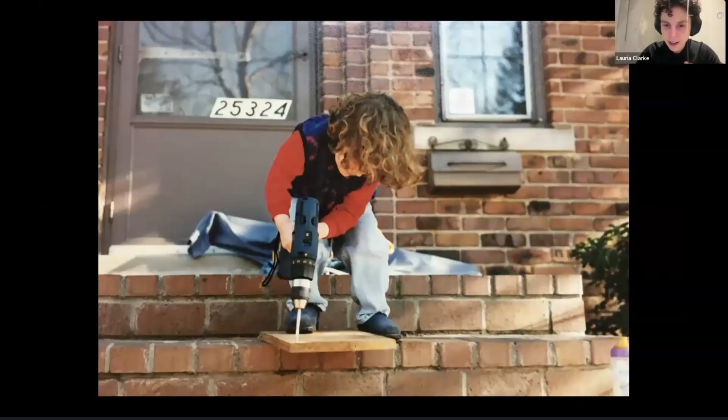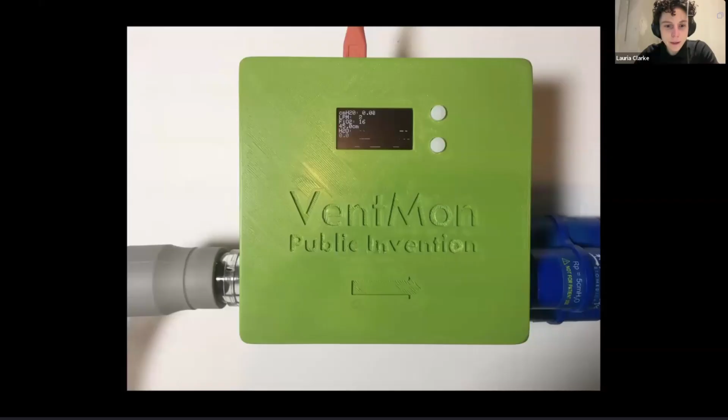I think Robert also had another copy in Texas at the time, and we went back and forth as we built the device. As the project matured, the look and feel of it did too. I think this was sort of a middle iteration, and perhaps at the very end of my involvement with the project. I think Forrest Lee Erickson was responsible for this awesome green enclosure and the nice LCD screen you see there.

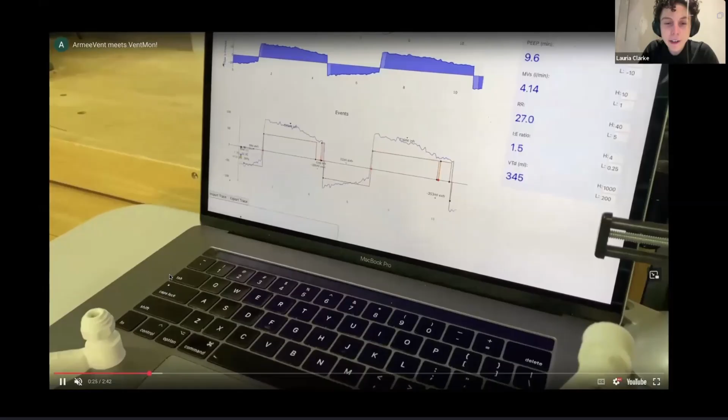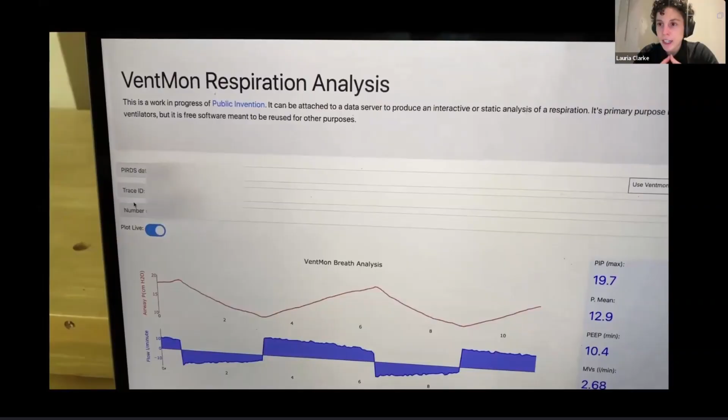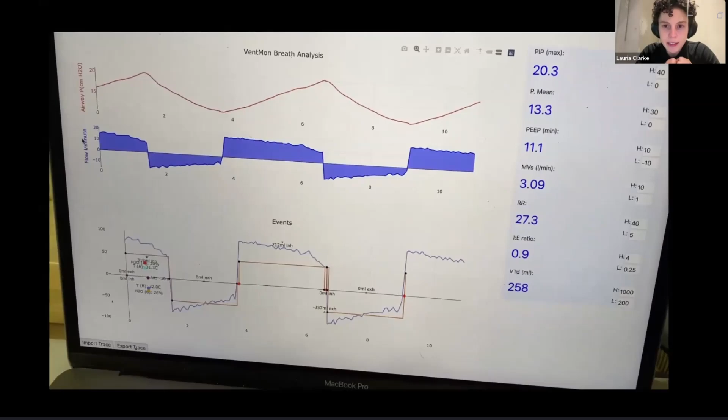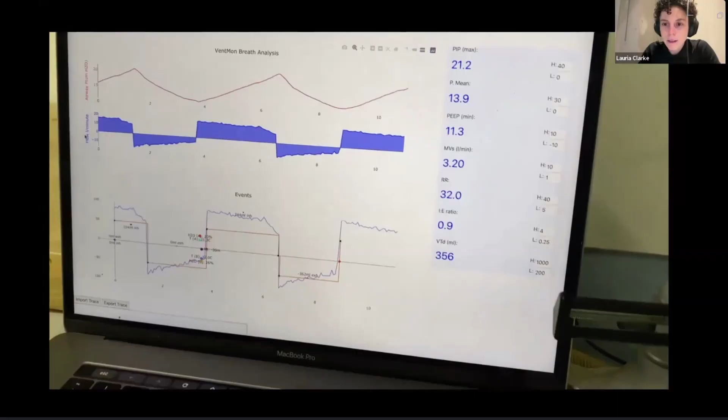I think the most exciting part of this project for me as a younger engineer was bridging this gap between physical hardware and digital data. This was the first time I'd worked on a project where we actually streamed real-time data that wasn't just a video stream or something like that, but actually manipulable, quantifiable data that needed quite a lot of different metrics and display values. So this was cool, my first example of this type of project, bridging a hardware interface to a browser-based web interface that anyone can access. As it turns out, this particular skill set has become totally crucial to what I do today.

So in general, I'm a creative technologist. I basically do the engineering, the electrical engineering, and embedded systems development behind artworks.

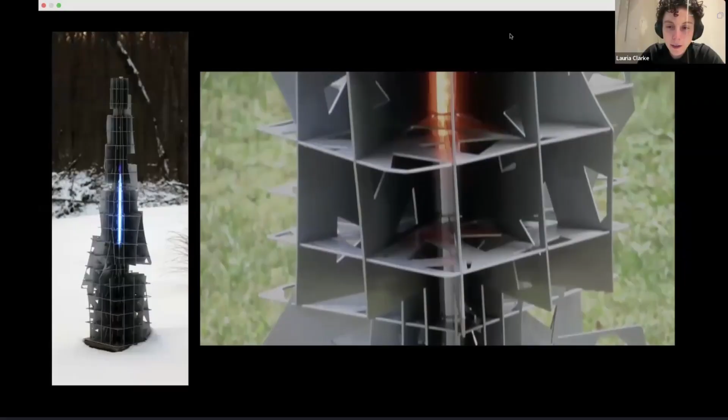I recently had a chance to rebuild an artwork that I created with my undergraduate mentor about 10 or 12 years ago. It was super satisfying to see the difference between my work in 2015 and now. I received this sculpture that sat outside for 10 years in my professor's yard, and eventually it stopped working. He contacted me about 6 months ago saying, hey, I have a solo show coming up, can we revive this sculpture? So I received this box of crusty, rusty electronics in the mail, and it was really fun to open it up and think, oh my gosh, what was 19 or 20-year-old me thinking. So it was fun to compare the 2015 version to the 2026 version.

For an indoor installation, we decided it would be way more fun if anyone could browse a map and pick a location anywhere in the world to find out what the wind speed was and the ambient air temperature, which affects the color of the animation. So for me, this project was super satisfying as a retrospective look at the past 12 years of my growth as an engineer, and a good reminder of how we bridge this hardware-to-interface gap. There are so many different ways.

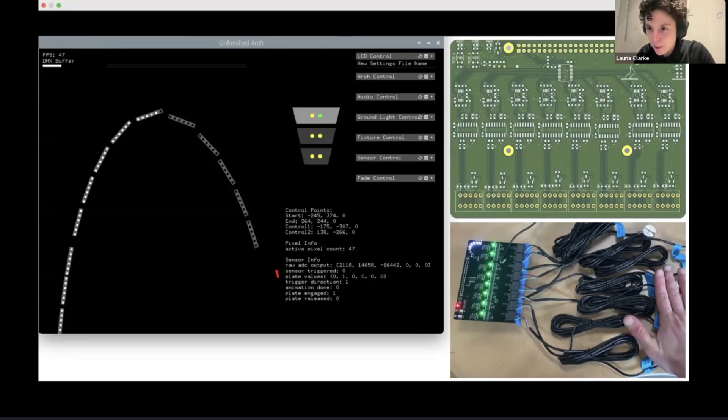In effect, these electronics are really similar to what you would find in a weigh station, which I found quite interesting. If you're ever curious about how weigh stations are protected from lightning strikes, it's a fun rabbit hole. Anyway, same way that giant metal sculptures with load cells in them are protected from lightning strikes.

So lots of hardware engineering in this job, and we're constantly revising the hardware that exists inside these artworks. In this case, I've spent a lot of time recently creating a custom ESP32 based development board that has a special audio amplifier, and this is going to be used in an artwork that contains thousands of speakers, which all make a different noise, and they're activated by viewers present in a room. We're constantly trying to iterate on the hardware and software behind these artworks to make them more responsive, more flexible, and more adaptive to different installation environments.

So in this case, our main objective is, how do we upload new sound files to each speaker over the air instead of having to manually pop an SD card in and out of each one, which, as you can imagine, when you get to 4,000, adds up.

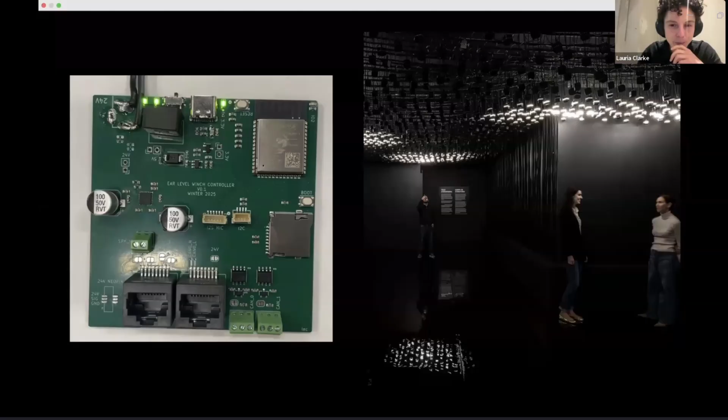I'll end with this recent artwork. We recently did a large show at the Museum of Modern Art in Mexico City. One of my jobs, or the artwork I was in charge of during this show, was called Homage to Felgérez. Manuel Felgérez is one of the first digital artists, pioneers of digital art in Mexico, and an inspiration to Rafael. So we knew that this kind of loose idea, that this particular artwork would be these three words projected in space onto this sculpture.

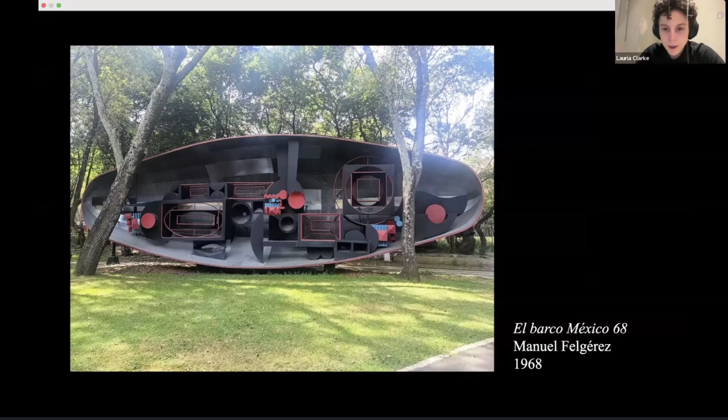Depending on the viewer's location along a path in front of the sculpture, different words would appear depending on your perspective. That was sort of the brief, and there wasn't too much more information. This was what a render looked like, and my colleague made this drawing, but nobody really knew what was going to happen once we arrived in Mexico, and there was about a week to figure it out.

So we bought some projectors with the different words. These are the kind of projectors you would see outside a store, for example, spinning on the sidewalk with an advertisement. I arrived in Mexico with 2 Pelican cases full of stuff. I've got one right next to me right now. Don't go anywhere without them.

Because we weren't sure if we were going to be using Axis security cameras to detect people near the sculpture, or if we were just going to put it on a timer, or project all 3 words at the same time, there were lots of unknowns, and we really needed to be in the space before understanding all of these variables. So in the end, we realized that the amount of time people walk by this artwork isn't actually that long.

It's only about a minute at most if you walk slowly, so we had a minute of time to capture people's attention. Therefore, tracking people all moving in the same direction wasn't going to be useful to us. So we determined that using a simple timer sequence would be the most effective way to move through the words and help people move along the path with the 3 words.

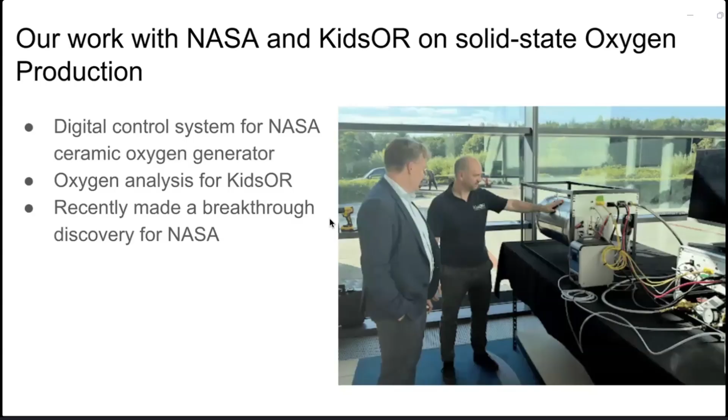We did not make the chemistry. We did not make the solid oxide actual oxygen generator, which is the most interesting high-tech part. But we made all the other electronic stuff around it that controls it and keeps it at the right temperature, which is no joke because it operates at 750 degrees C. Now, I'm happy to say that recently we've made a pretty major breakthrough that NASA is excited about on this project as well. So now I'd like to hand the mic over to Victoria.

Thank you, Rob. I realized that my red light and my nebula picture makes me look very red, but there's nothing I can do about that right now.

I'm here to talk about Global Distributed Tracking, which is a software platform built under the Global Open Source Quality Assurance System, which is a project of Public Invention. And we have a launch video that we'd like to share with you. Rob, go ahead with that.

Across the globe, delivering life-saving aid. But tracking those vital shipments to the last mile can often prove impossible. Fraud and theft can be widespread with no transparent documentation to light the way.

From the open source team that built a new PPE supply chain in 2020 and became NASA contractors in 2022 comes a solution. Our Global Distributed Tracking System, GDT, allows you to track aid deliveries from point of origin to the final recipient. No download, no login, no fee.

With a simple scan of a QR code, you can ensure that aid reaches the right person. Because GDT is fully encrypted, documentation is secure and private, even in conflict zones. Now, anyone with a smartphone can verify chain of custody within their humanitarian mission. Global Distributed Tracking.

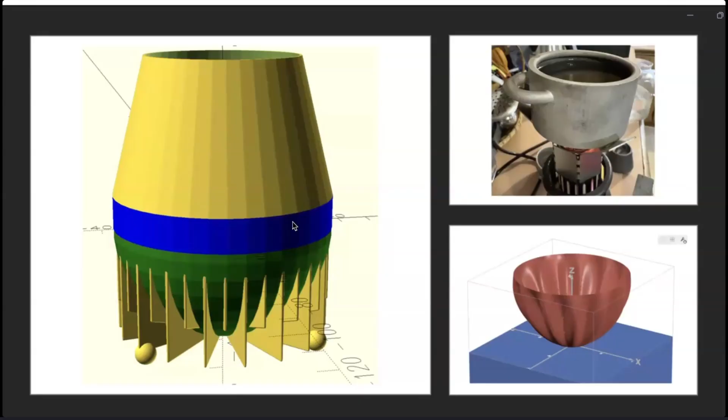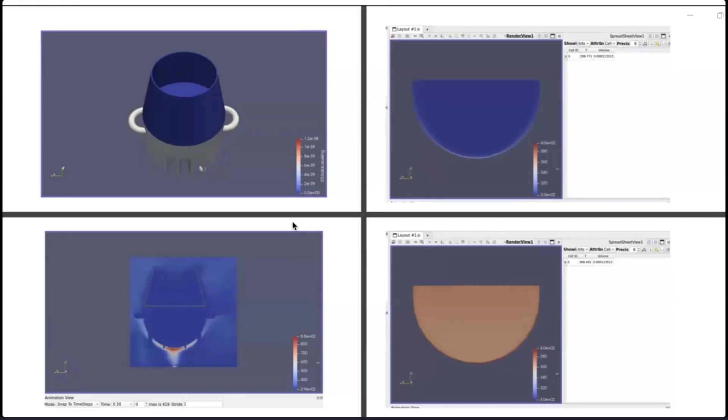The 2 pictures on the right show the water inside the pot during a simulation. The top right is the water at the beginning of the simulation, and the bottom right is the water probably about 2/3 of the way through, and you can see the difference in temperature. This will be used to calculate the efficiency of the pots. And that's just a quick overview of what the EcoPot project is.

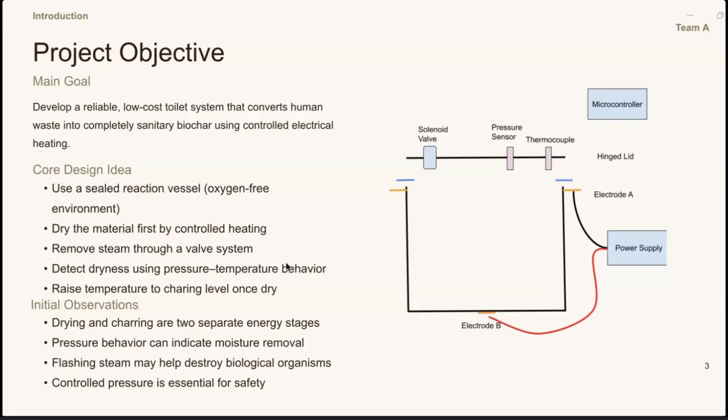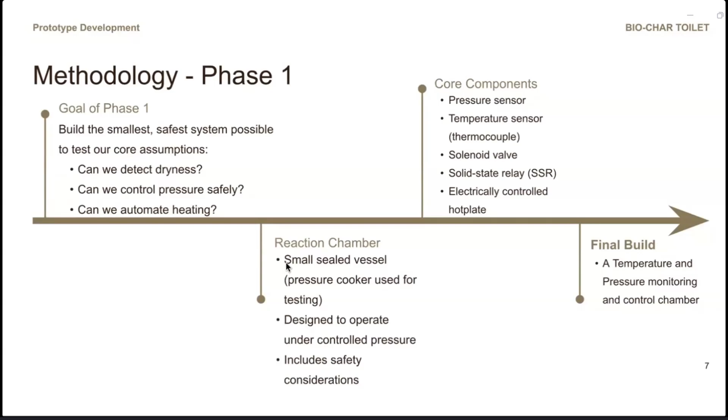So our first goal questions are: can we detect the dryness, and can we keep the pressure in the chamber safe? Because handling a high pressure environment is always a hazard. Can we automate the heating process, and can we turn off the heating when the pressure is detected?

What it actually does is dry the material in the sealed chamber, and when it detects there is no moisture content in the chamber, assuming the heating is still increasing and there is no change in the pressure, it detects the sample as dried.

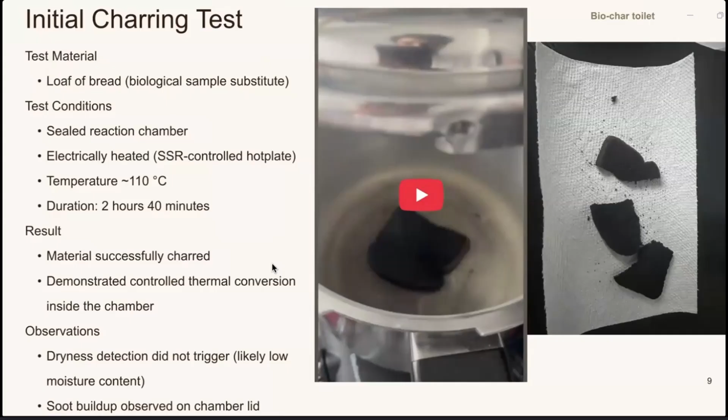One thing we observed is that because the samples were very small, we were not able to detect the dryness of the sample. Also, there's a lot of soot residue which has formed at the top of the lid. So these are the next two goals we are going to tackle.

So, yeah, and heading over to Peter.

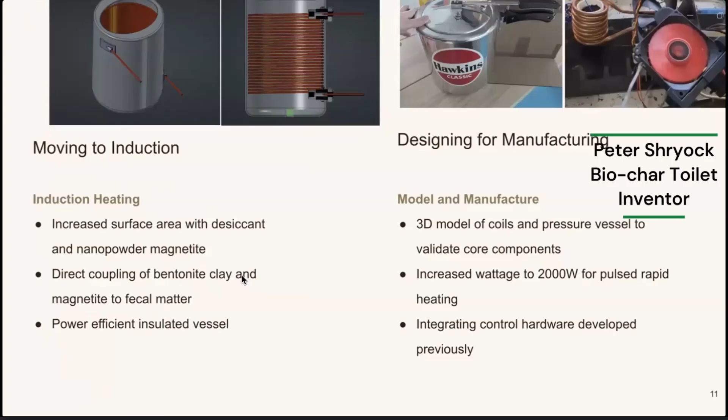Hey guys, so what we're going to work on next is developing an induction system with a bentonite clay and magnetite blend. Our hope is to use the bentonite clay to wick up the moisture, and the magnetite embedded in it will heat up using induction coils, so we have more thorough heating of the sample, better control, and ideally make it more efficient.

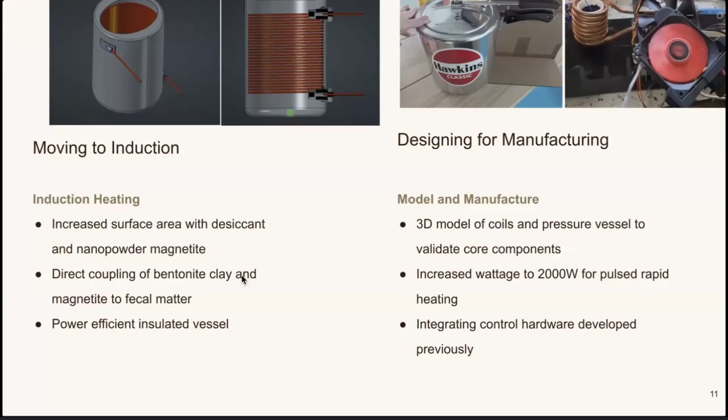We're currently modifying a Hawkins Classic pressure cooker, and we intend to bend our own coils and make some of our own modifications to the fittings as needed. We're hoping this will be really successful, of course.

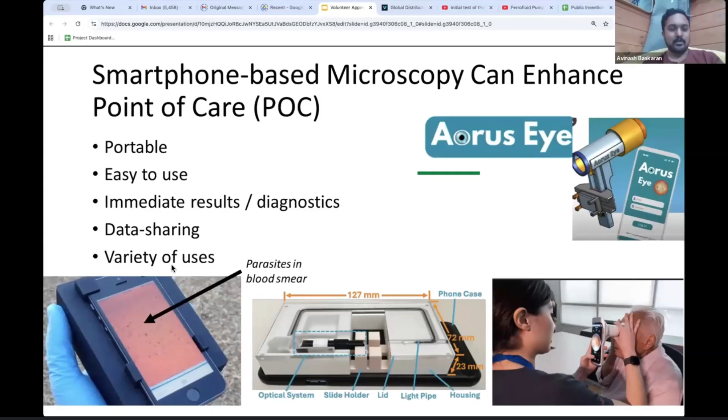So I'm representing the Librecorder project. Librecorder is an attempt to address some of the issues around smartphone-based microscopy, mobile microscopy, or generally point-of-care microscopy. Currently there's a diverse range of designs being explored for point-of-care microscopy, that is microscopy done at the interface where a patient first interacts with a healthcare professional.

The benefits of such a system are obvious: it could be portable, easy to use, provide immediate results in diagnostics. The data could be shared and portable, and really a variety of uses come from that. For example, it can be used in healthcare settings, but perhaps also to identify E. coli presence in local water supplies and so forth.

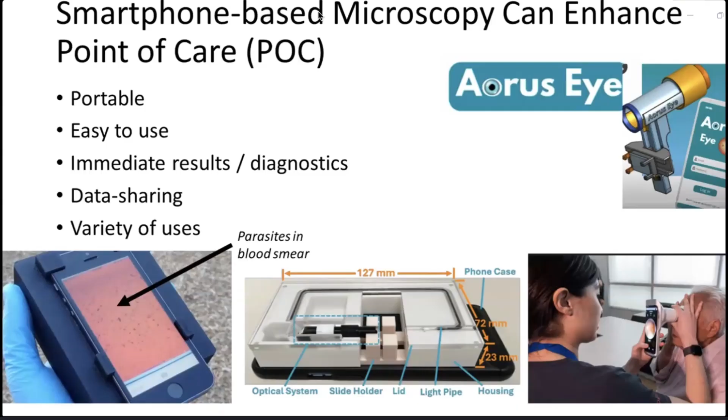What we realized when we started to analyze the design space of point-of-care microscopy is that each design and device is highly localized to a particular disease context and geographical context, among other constraints.

We started asking ourselves, there are a lot of strengths and weaknesses to the diverse designs, but how do we quantify whether a design is appropriate or well suited to the disease and context it's trying to tackle? And from there, how do we design a microscope that is both generalizable and highly useful?

This is just an overview, but we've actually written a pretty comprehensive systematic literature review of microscope diagnosable diseases and the clinical workflows involved in diagnosing those diseases, down to a very detailed level.

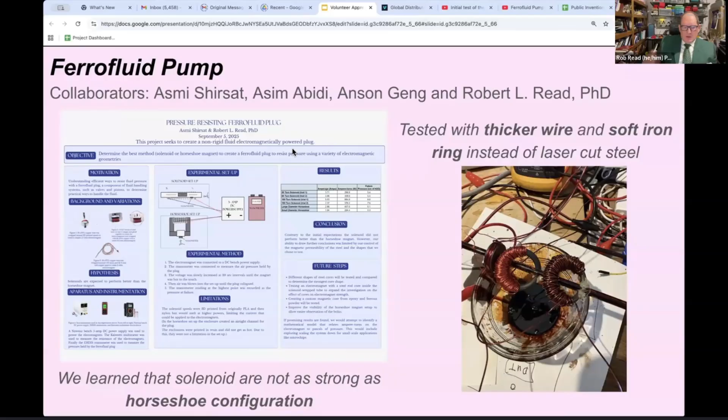Yes, so my name is Asmi, and I'll be presenting the Ferrofluid pump, which is an electromagnetically powered pump. The idea was to have something with no rigid parts made from ferrofluid, which, if you don't know, is a magnetic fluid. I'm working with Asim, who's actually in the call right now, and Anson, who can't make it, and with a lot of help from Robert.

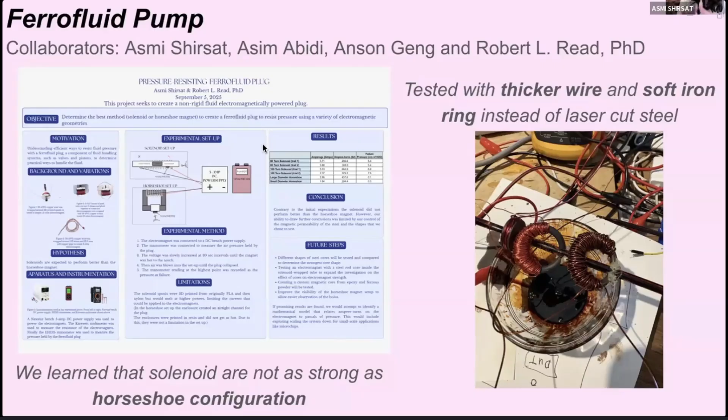Like we said, initially it was a little bit slower. So initially we just started with a ferrofluid plug, and we tried to understand how much pressure it could hold, and how we could change the amount of turns, the core material and the core shape, and how many things we could change to really get a strong pump or a strong plug. We learned that the horseshoe configuration was a bit stronger, using thicker wire and a soft iron ring as a core. Those initial conclusions were made to now lay the foundation of what we're working on right now. With that foundational knowledge, we're designing a pump that works by pulling ferrofluid up by turning on and off this magnet that you'll see.

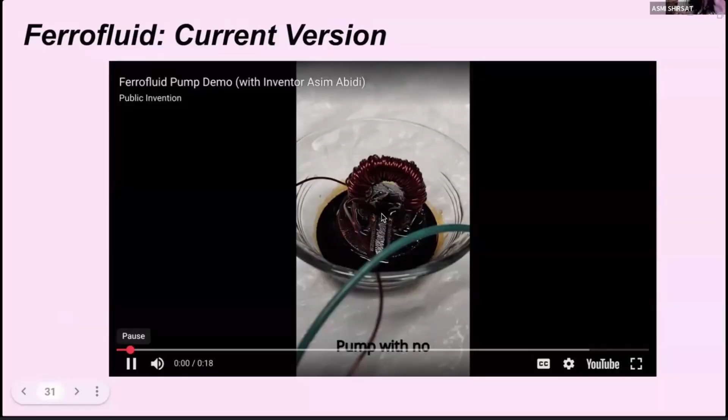And now after automating that pumping, we got a little bit of a more obvious and more efficient pump with no moving parts, tested with a 30 millisecond pull and 40 millisecond release.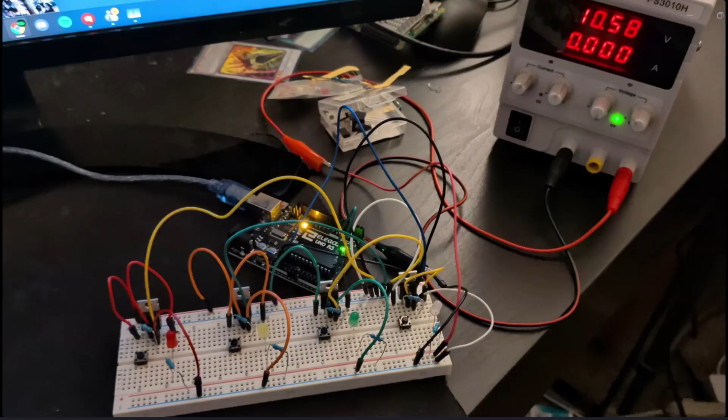That includes making a transistor setup, as you can see on the left, which is just a short video proving that it works. This is the current 4-transistor design without code, so the buttons are directly driving the 4 transistors. As you can see, they all work, and it takes amperage from the power source rather than the Arduino. The Arduino serves as a voltage supply to drive the transistor gates.

So we're basically working on how to make this singular magnet pump boat into something that can use more magnets to pump at a stronger rate and hold a stronger pressure. We're also going to consider using air pressure, so it's not something that has to be vertical. There's a lot of future things to do, and it's really exciting.

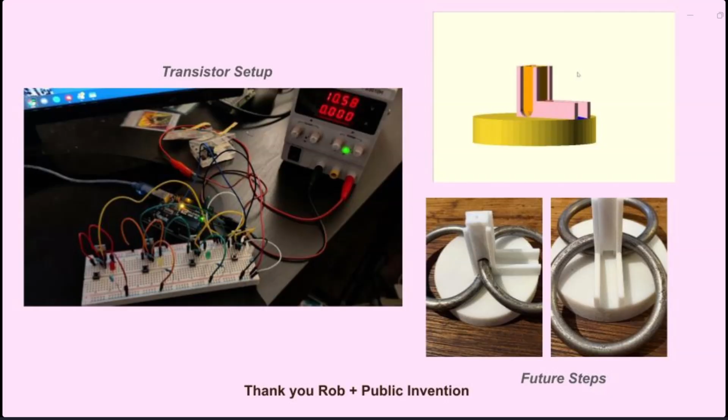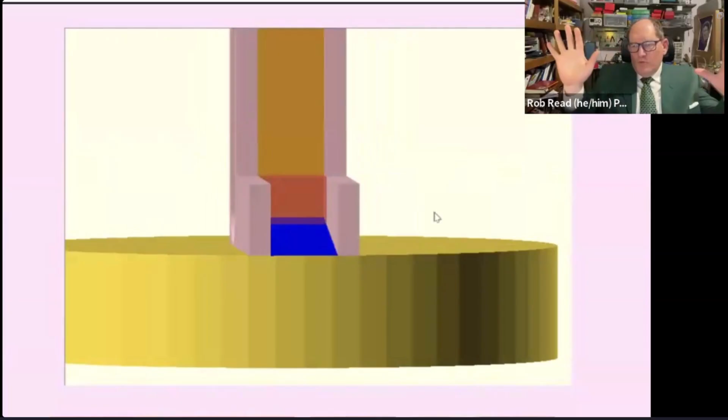I want to emphasize something because it can't be said enough. What you just saw was not a very good pump—it only pumped a little bit of fluid. But it has no moving parts. No moving parts, get that? We're pumping fluid with no moving parts. This is approximately the first time this has ever been done. This is, in my opinion, kind of a big deal. This is a game changer, because if you can make a pump with no moving parts, you can make an extremely small version of it—for example, to move fluid over a very hot microchip, or for biological purposes. So it looks like a janky little toy, but this is actually a very interesting invention, in my opinion.

Now I'd like to introduce Mohamad and Mzafar, who's also in Canada. I'm very proud of our international relations, and I hope our Canadian friends can forgive some of the horrible things that Americans have said about them recently.

Mohamad is going to introduce the alarm dialogue management system, which leads into the Krake. Are you here, Mohamad? Yes. Hi everyone, I'll be presenting the alarm dialogue management, or ADAM.

This project, alarm dialogue management, is basically an MQTT router. It's completely software, so there's no hardware part in it. Its goal is to manage multiple alarms and send them to multiple Krakes or annunciators or whatever thing.

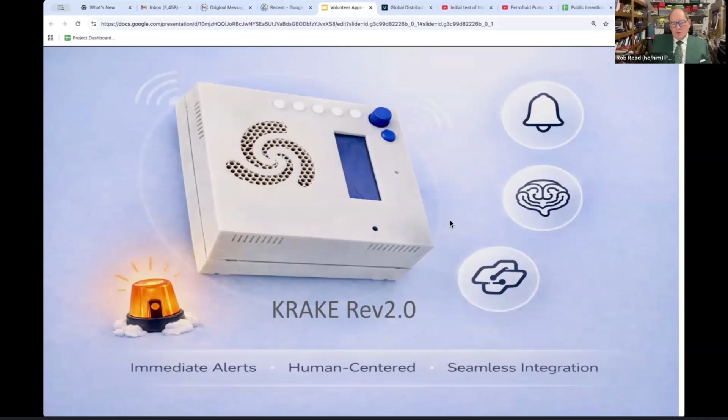There's also an excellent mechanical engineer, Yahya Ayman, from Egypt, and recently a woman from India, Yapti, has joined as well. And this team is mentored by Lee Erickson. I don't know if he's here, but Lee is a really excellent mentor for those kinds of things. So I think they have a video for us to play.

The Krake is a dedicated wireless alarm device designed to inform human operators of critical conditions they need to know about, clearly, reliably, and without distraction. Krake is an annunciator, a hardware device designed to get a human's attention and inform them about a specific problem. Krake have a protocol to handle alarms and process the response of the operator.

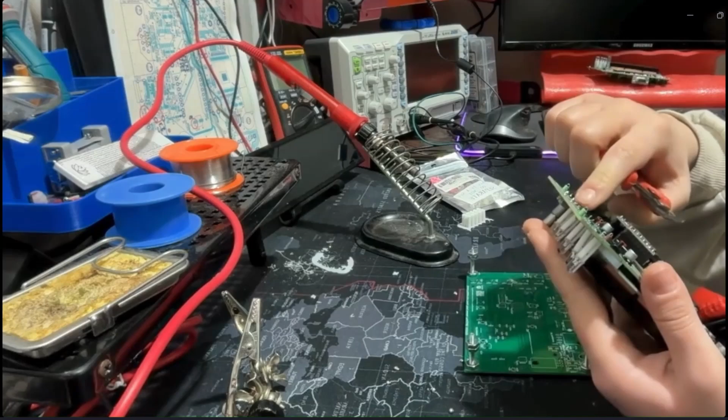There are a variety of uses for the Krake, such as in assisted living scenarios or in pairing with other equipment, medical or industrial, or to any other machines in your residence, providing immediate alerts for events based on policies and severities that are implemented by the ADAM and by a separate ADAM project.

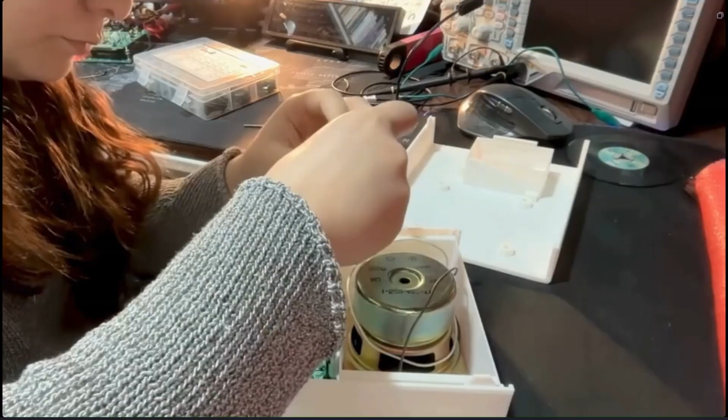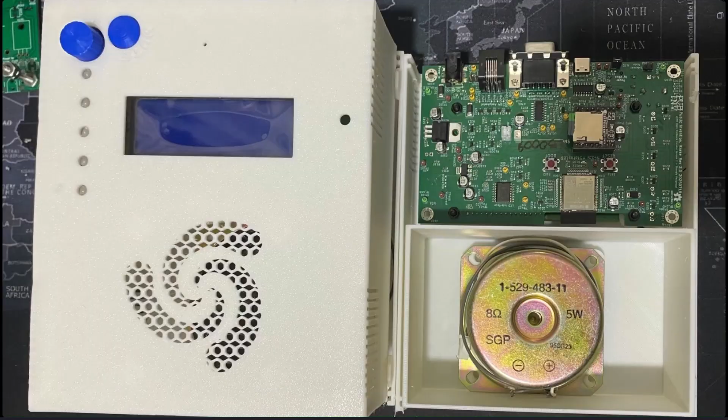To maximize interoperability, the Krake is designed with both SPI and UART connector, RJ12 and RS232, allowing Krake to be connected to equipment without Wi-Fi capabilities, acting as a peripheral device announcing the alarms of the machine it is connected to. The alarms are divided into 5 levels of severity, ranging from informational alarms to critical and emergent alarms. Krake helps deliver alarms that are timely, meaningful, and trusted when they matter most.

Krake features 5 bright LEDs for visual alerts, a customizable audio system for speech and alarms, an LCD display along with a rotary encoder for simple menu navigation, and a mute button to handle the alarms, Wi-Fi network connectivity, and 2 different power options to enhance its versatility.

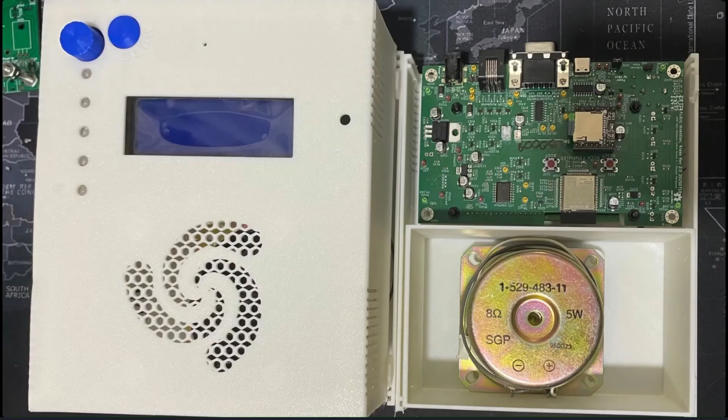Okay, so that was the voice of Courtney Ludick, and the part of the reason they submitted a video is because it's in the middle of the night for Courtney and Nagham. Courtney's in Scotland, Nagham's in Lebanon. But nonetheless, Nagham may have gotten up. Nagham, are you here? Hello.

Yes. Hi. Oh, thank you, Dr. Reed. So I hope you liked the video. I did.

Nagham has really grown into this position. She works, I don't know how many hours a week, unpaid for Public Invention. So it's my honor to present her the Best Public Inventor Award of 2025, which is the highest award presented by Public Invention. So yay for Nagham. Nagham, please say a few words.

Thank you. So Krake's team doubled in size during the past year, and unfortunately, due to the late hour, most of Krake team is not present today, as Dr. Reed just mentioned. It's 4 a.m. and 2 a.m. for my teammates. But we hope you liked the video we collaborated on. So Krake, as mentioned, is a peripheral wireless alarm annunciator designed to transmit critical alerts to human operators. And recently, Adam started growing as well, and we hope together we'll be bringing a useful project to the world.